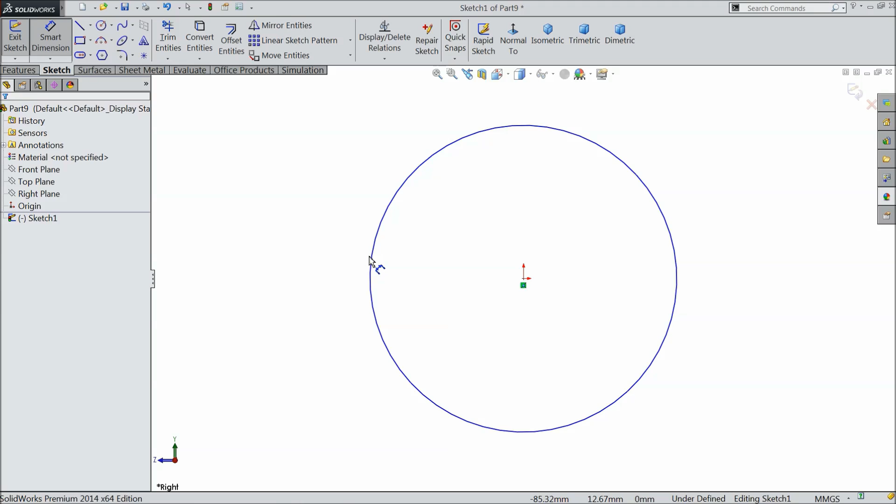Do the next part, shaft. Right plane sketch. First we will create a circle and keep the diameter 10 mm, and extrude it, extrude up to 200 mm long.

Choose chamfer at both ends. Select both ends, 1 mm, 45 degrees. Okay, that's it.

Now again choose right plane sketch, and here draw a bigger circle, let's say 14 mm.

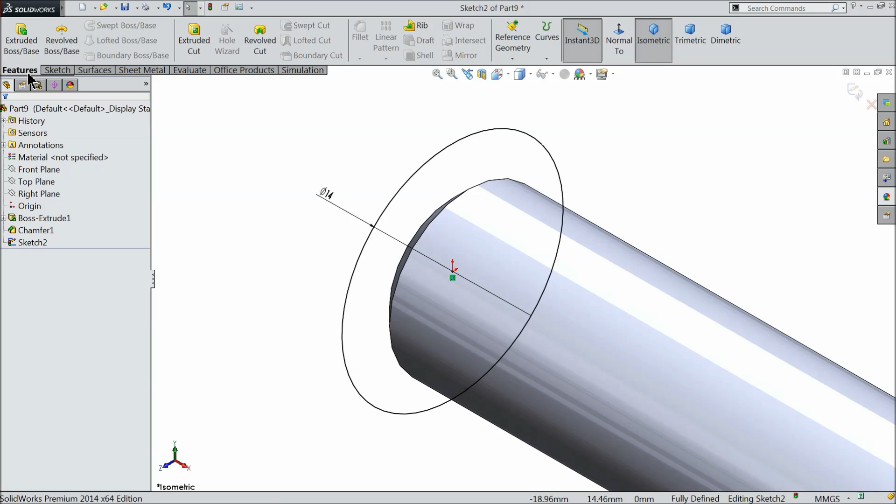Select extruded boss, only 10 mm. Select here offset, 70 mm. Now let's see, 70 mm from right plane. Okay.

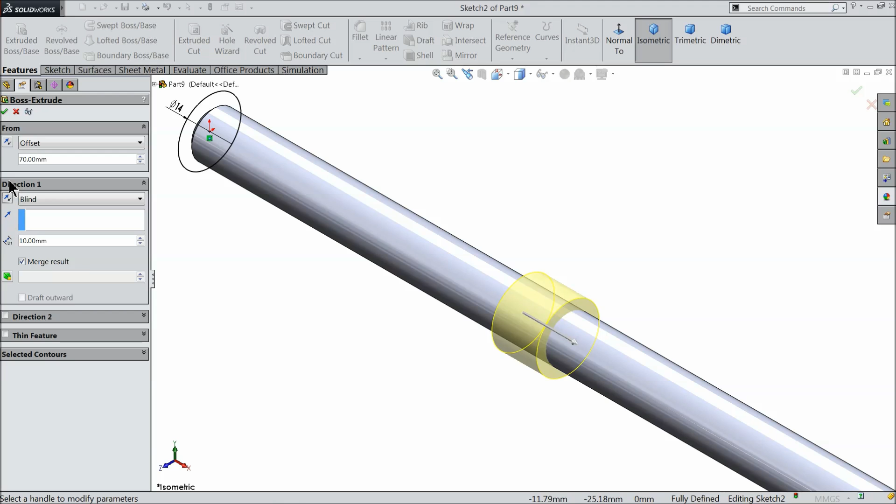See. Now let's give the material to the shaft. Metal, and let's say copper, polished copper. Save. Part number 9, shaft.

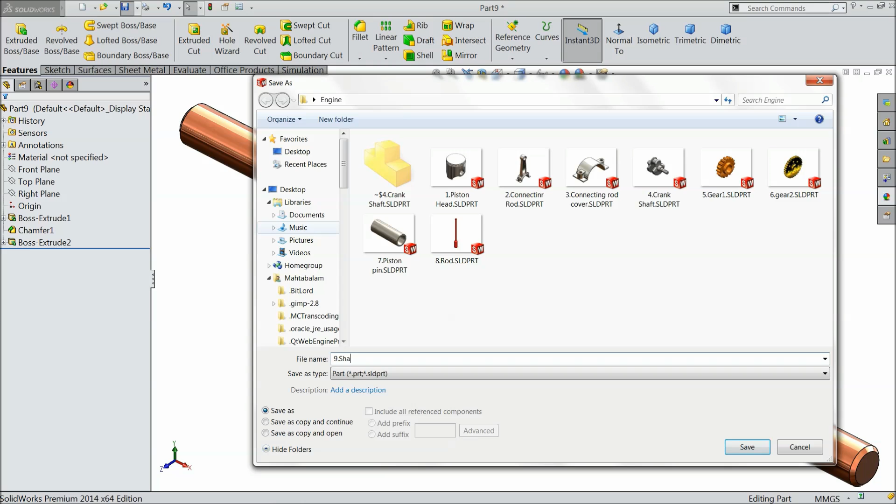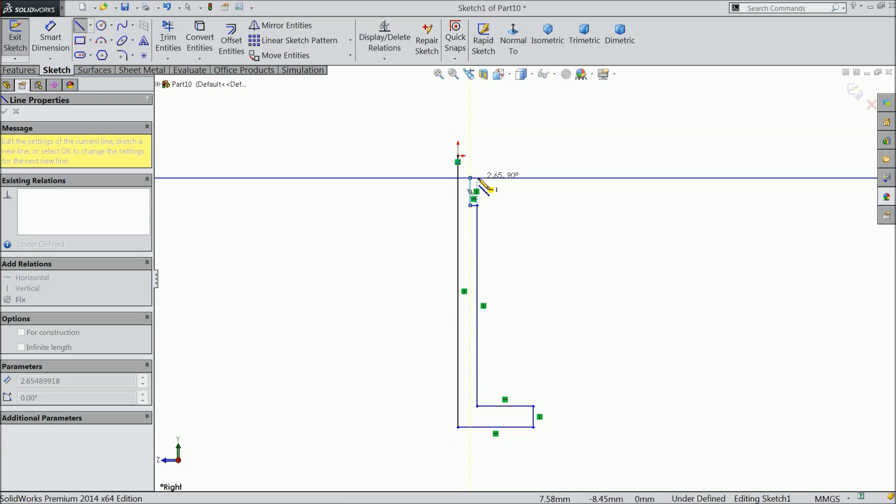The next part here, engine valve. Right plane sketch, line, and start from origin point. Draw a line downward direction. Connect. Exit.

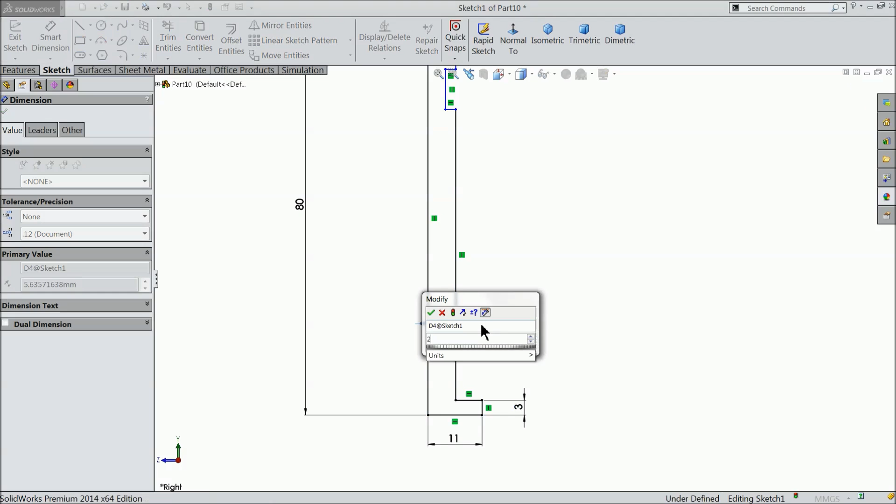Overall length 80 mm. 11 mm. 3 mm. 2.5 mm. 3 mm. 5 mm. 1 mm.

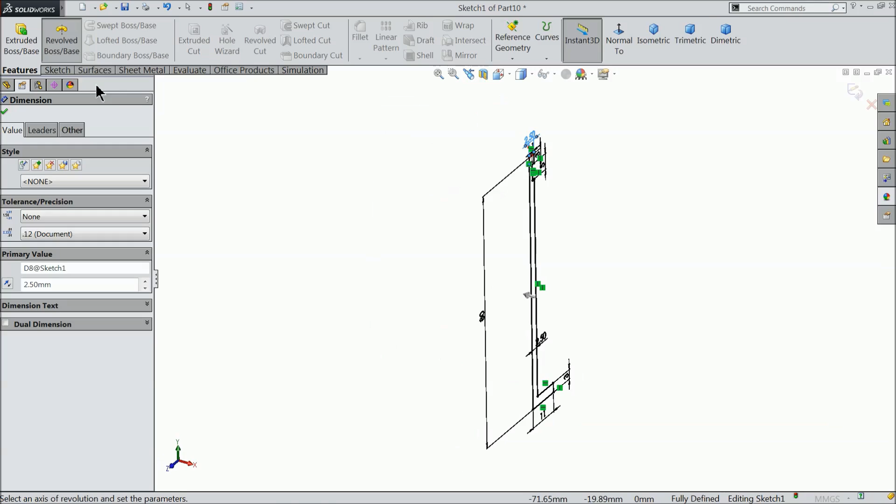Now, two 2.5. Okay. Now let's revolve this body. Select this outer line or mid line. Okay.

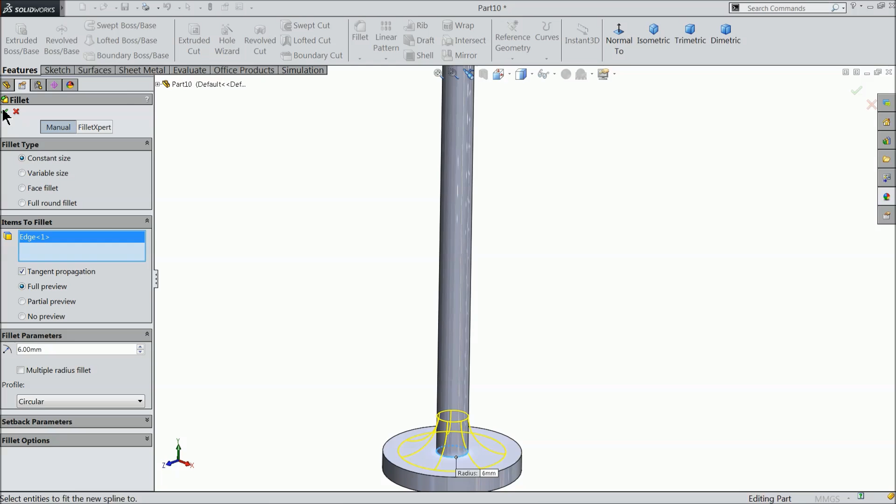Now fillet 6 mm and select this inside edge. Okay. Let's do the chamfer, distance 1/2.

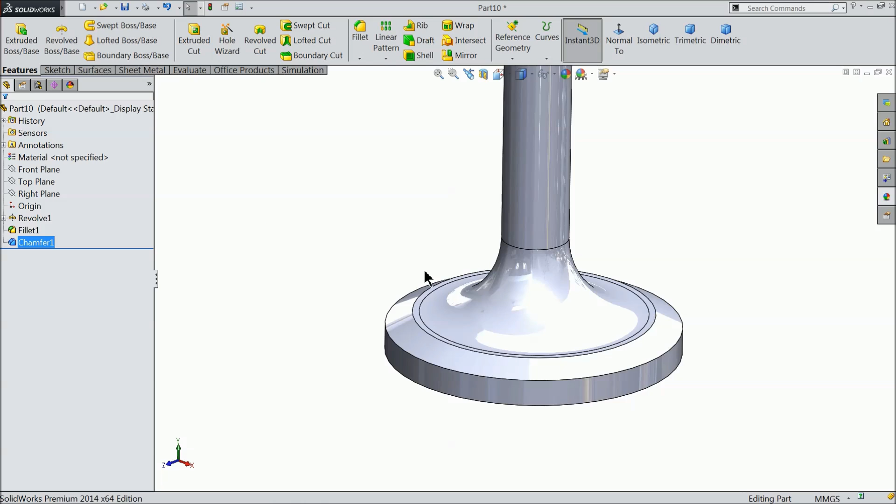Select, clear, select this outer edge only. Okay. Now it's time to chamfer, 1.5. Select the top face sketch.

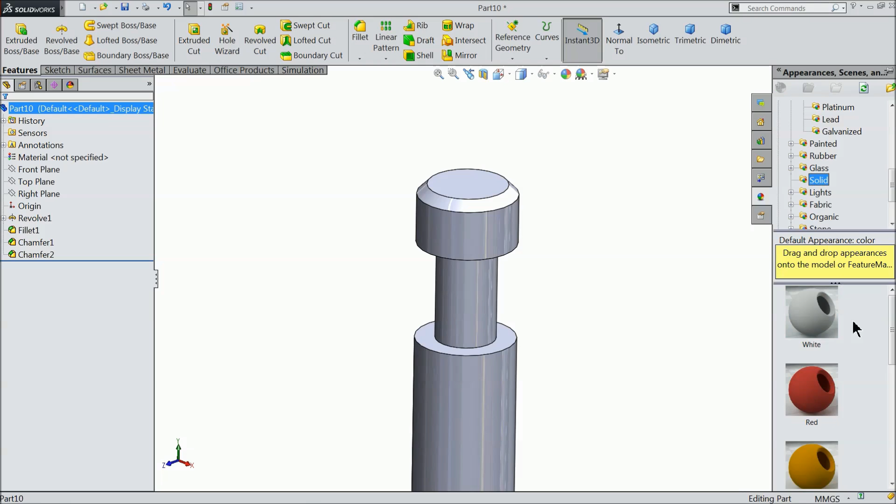Now it's time to define some material. Let's define some solid material, so it's easy to distinguish while it's operating. Save. Part number 10, valve.

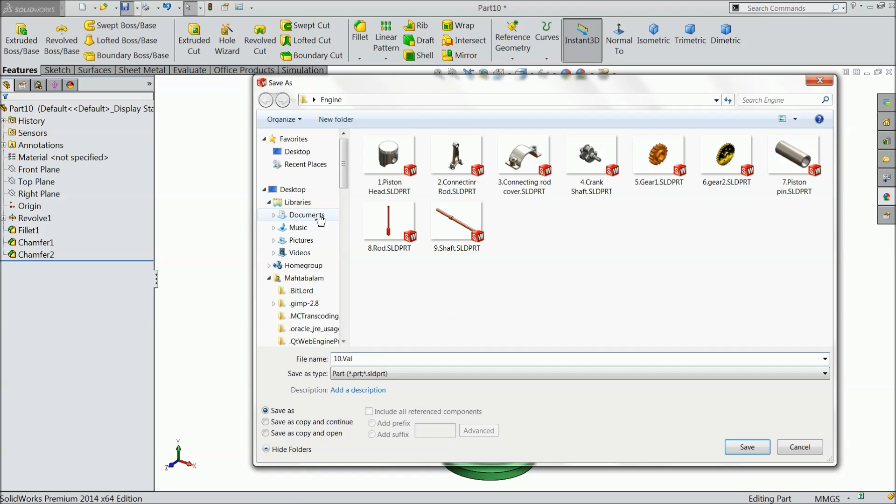Now let's do the next part, valve retainer, spring retainer. The next part here is valve spring retainer. Right plane sketch.

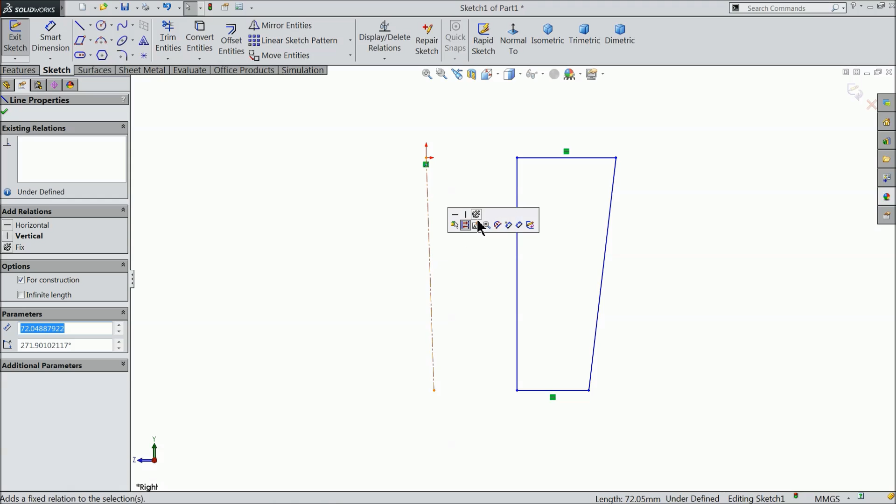Select line, exit, center line, and draw one vertical center line, exit. Select this line, make relation, select this line, vertical relation, make fix, one more relation, select origin point and this line, horizontal.

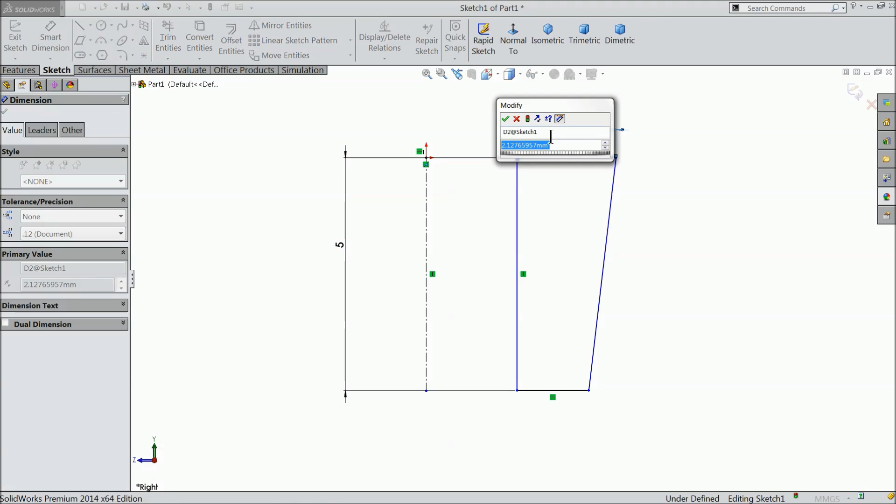5 mm, 3 mm, and the bottom line 2 mm, and let's keep the gap 1.5 mm.

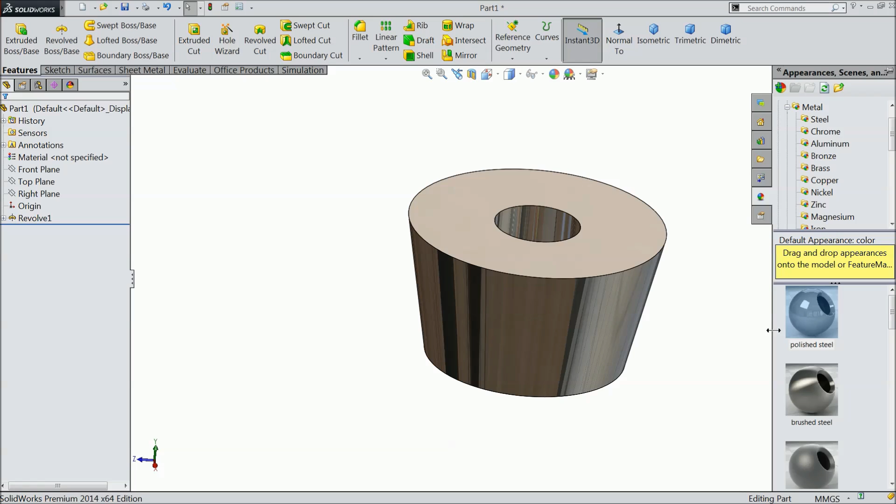Select revolve boss base. Okay. See, let's say steel, polished steel, and okay, keep polished steel.

Save part number 11, valve spring retainer. Save.

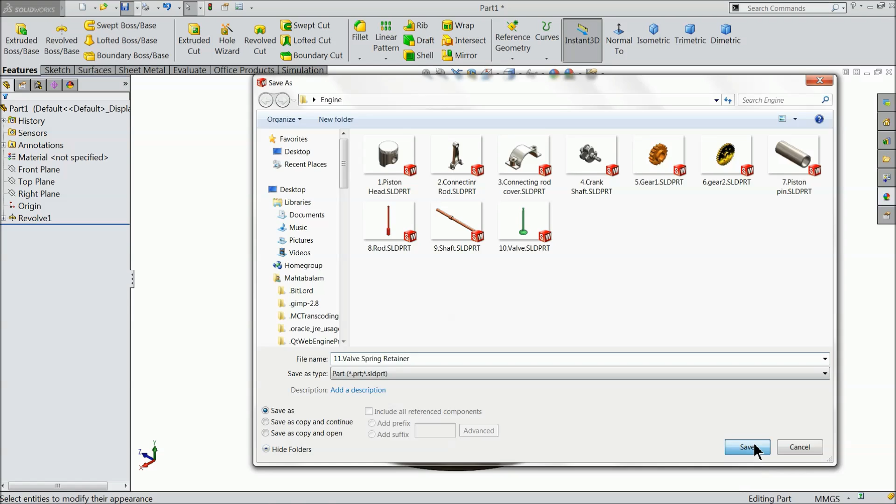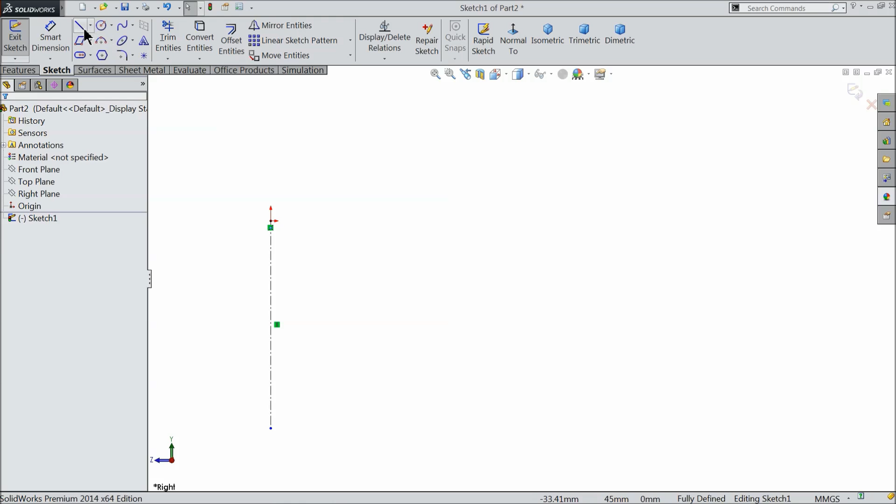Now here the next part is retainer. Right plane sketch, center line, draw vertical center line, that's it, line, and start from here, connect, exit. Now this is our one geometry.

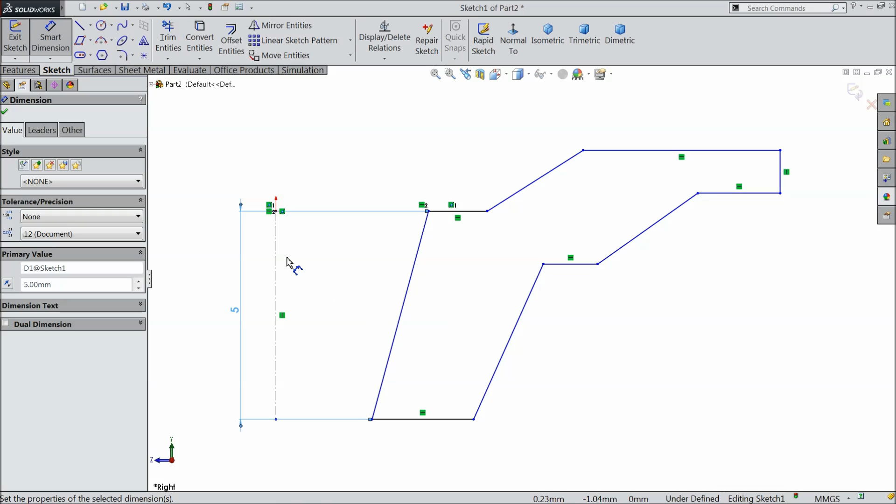We will make some relation. Make these 2 points horizontal. Five mm, 12.5 mm. Start from bottom line.

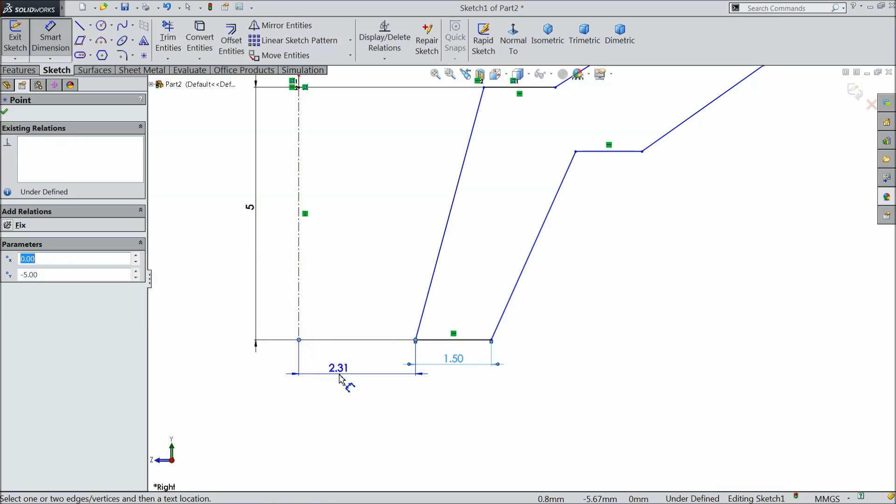One, 1.5 mm, 3.5 mm, 4.5 mm, 4 mm. This 6.5 and it is 4 mm.

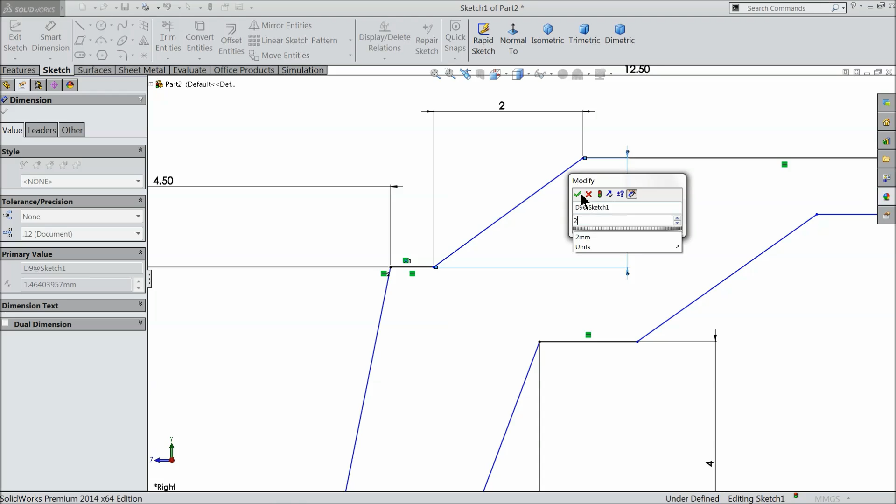Now two mm, again select and vertical also 2 mm. One mm and this keep 2 mm.

Okay. Now select these two lines, make relation parallel. Okay. Now see here.

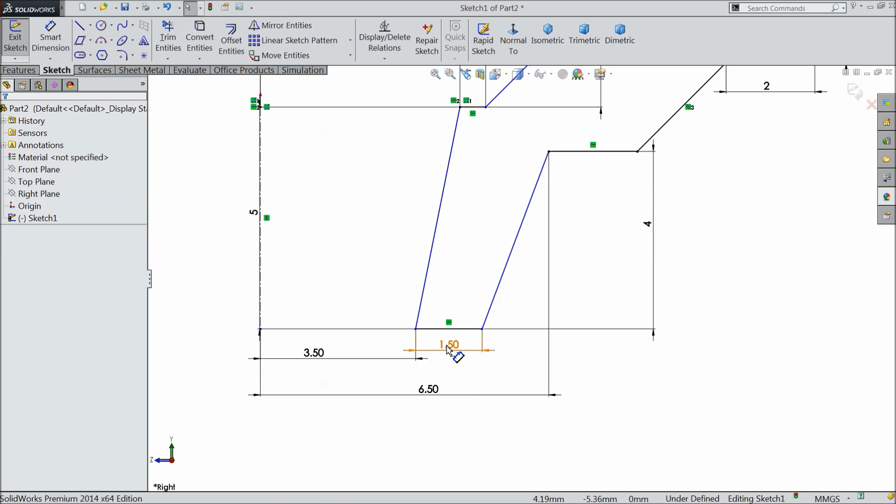This mid, 1 mm. Okay. Now this distance also we defined.

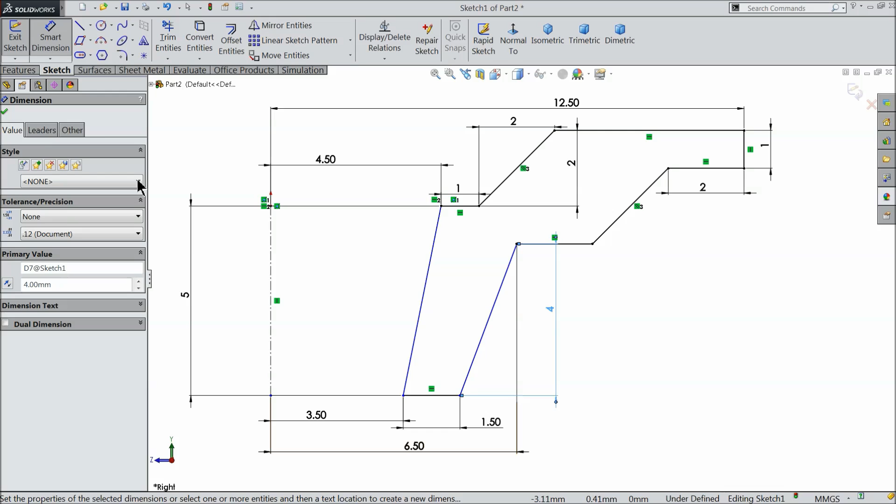Okay. Now select here fully defined sketch, calculate. Okay. I think everything we defined, nothing is balanced here. Cancel.

Select here revolve boss base. Center line selected. Okay.

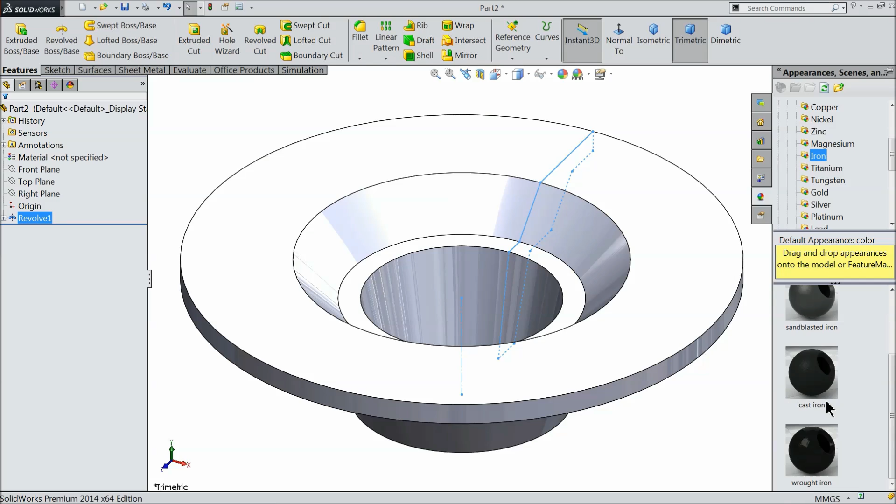And for the retainer, choose here iron, matte iron, sand blasted iron. See, save. Retainer.

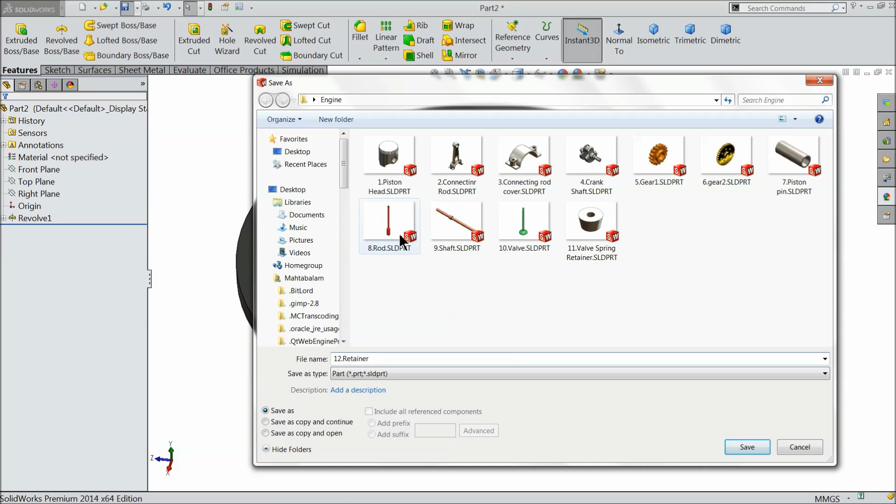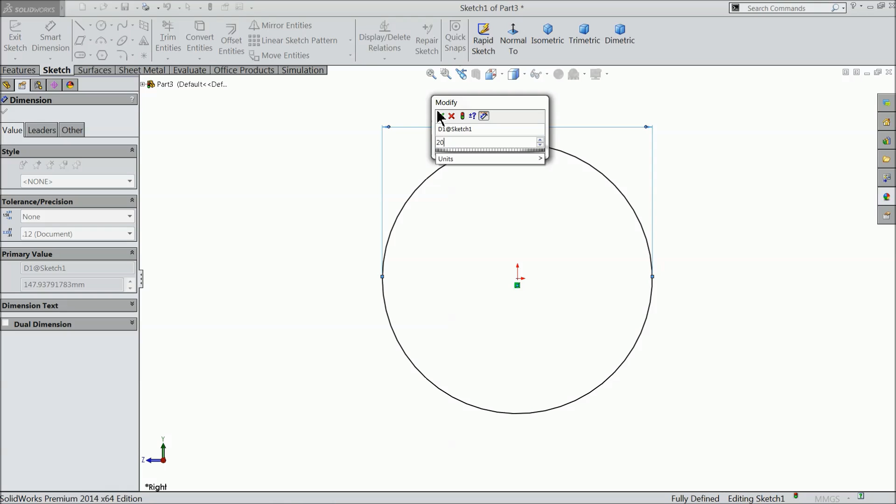Let's see the next part. Here the next part is camshaft. Select right plane, sketch and define a circle. Let's say the diameter is 20 mm. Okay, select extruded boss.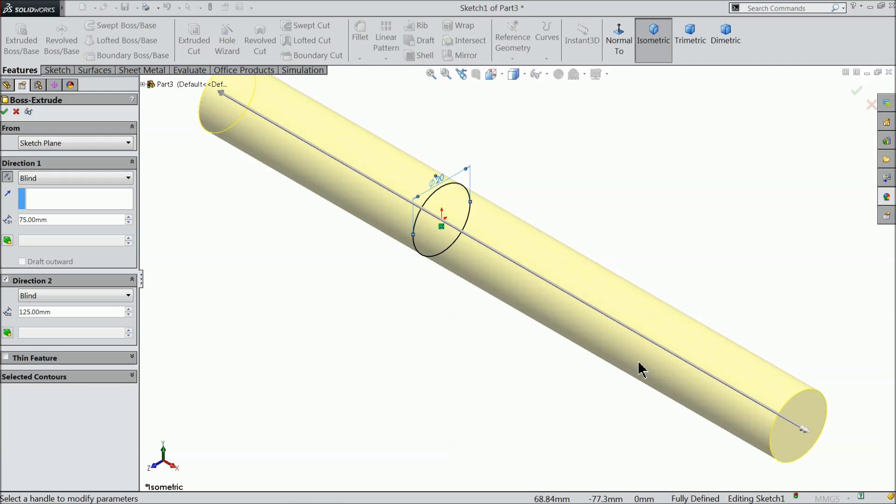Here first dimension select 75. Select reverse direction. Direction 2, 125 mm. Okay, now this is our dimensions.

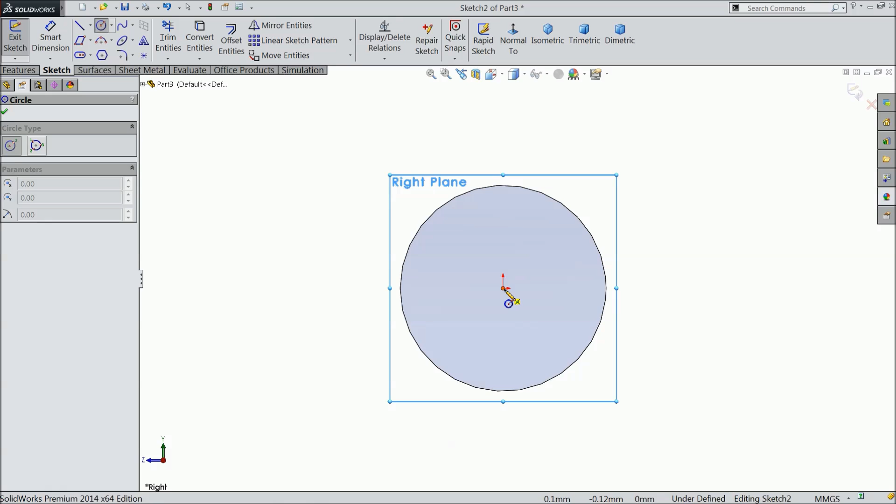Now select right plane, sketch normal, and here we will make some geometry. Diameter 24 mm.

Connect these 2 points. Again choose circle and draw a circle. Let's keep the diameter 10 mm. Okay. Now here select 3-point arc.

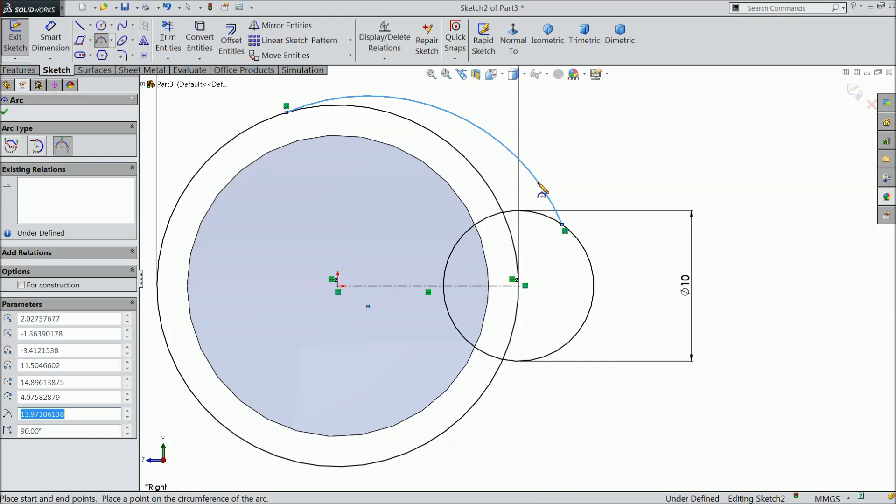Again select from this point to this arc, exit. Now here we want to trim some unnecessary part, so choose power trim, just press and drag. See, okay.

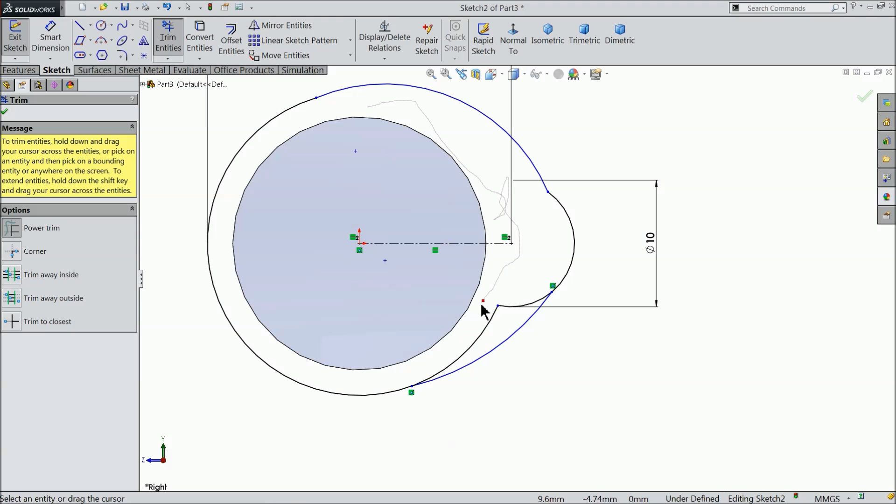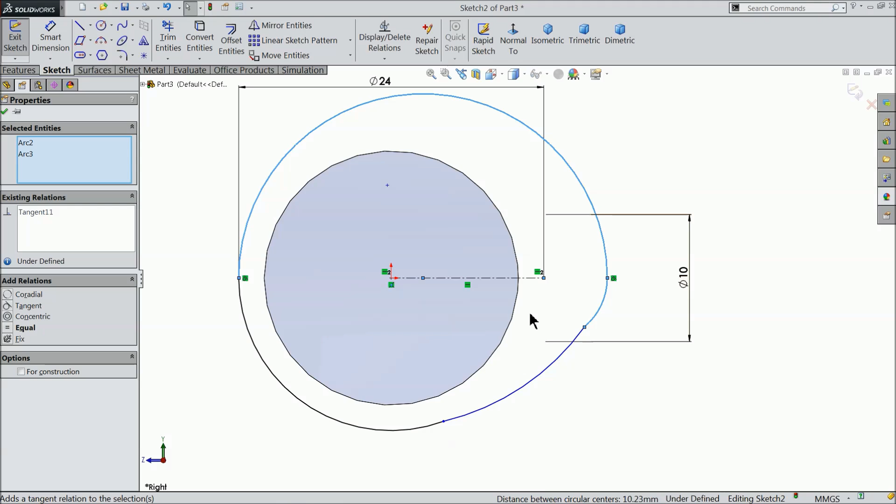Now let's prepare some relations. Tangent, tangent, make again, undo.

First define this radius, 16 mm, 40 mm, and this one 10 mm already defined.

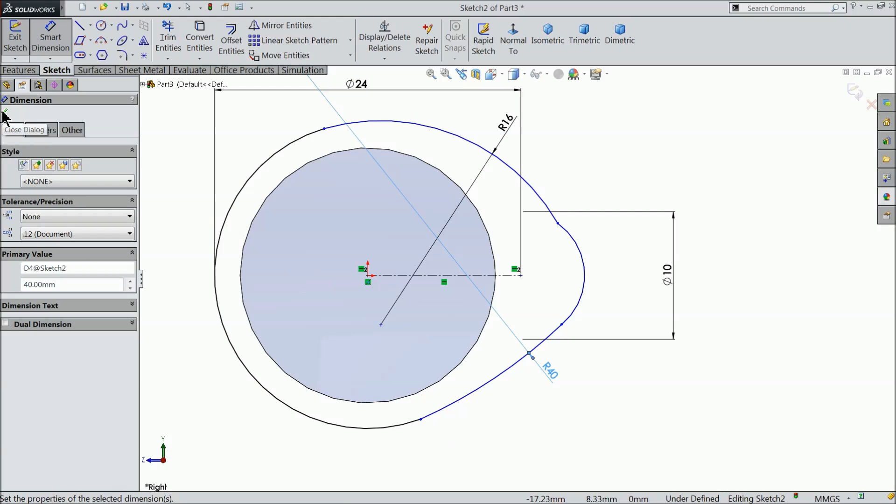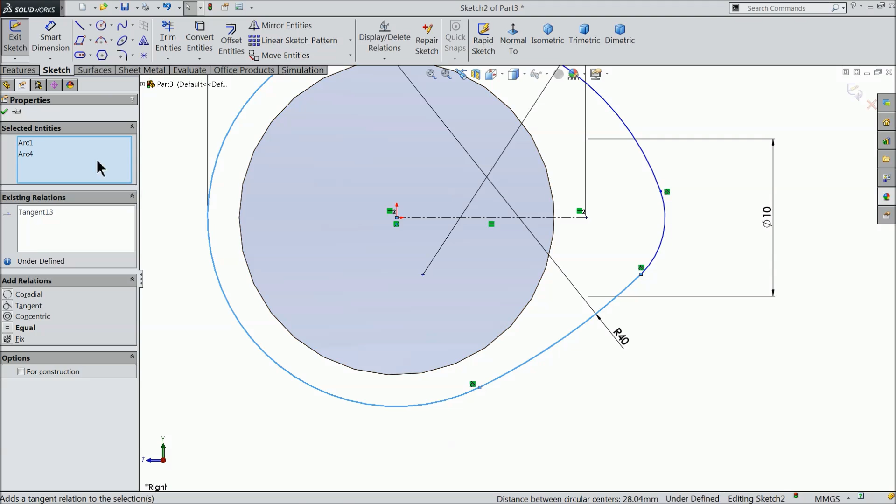Okay. Now let's try to make them tangent. Okay, and here also let's make tangent, and select the last one, tangent. Okay. Now choose smart dimension, select both end points, see, and select this arc.

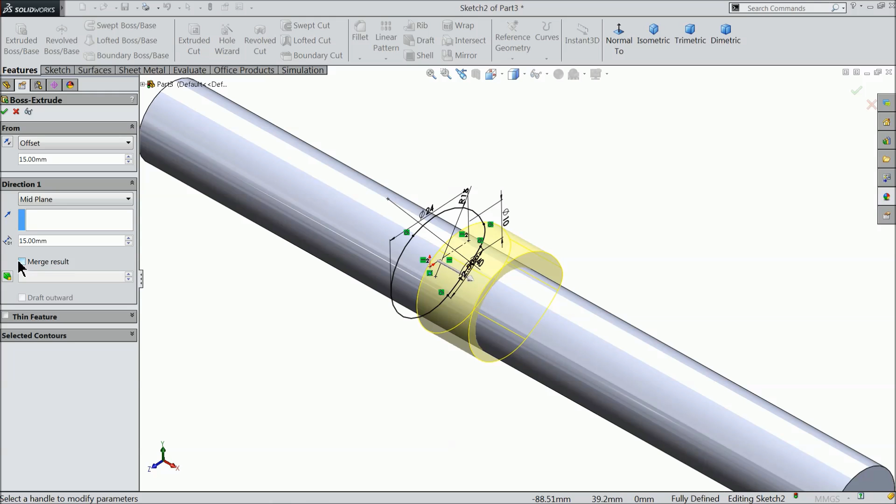Okay, see, now let's try to mirror. Select right plane, mirror, select this body. Okay.

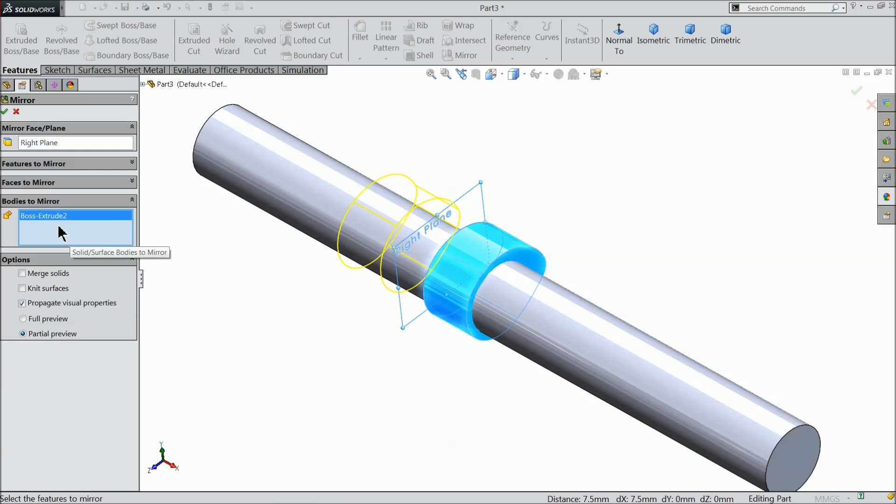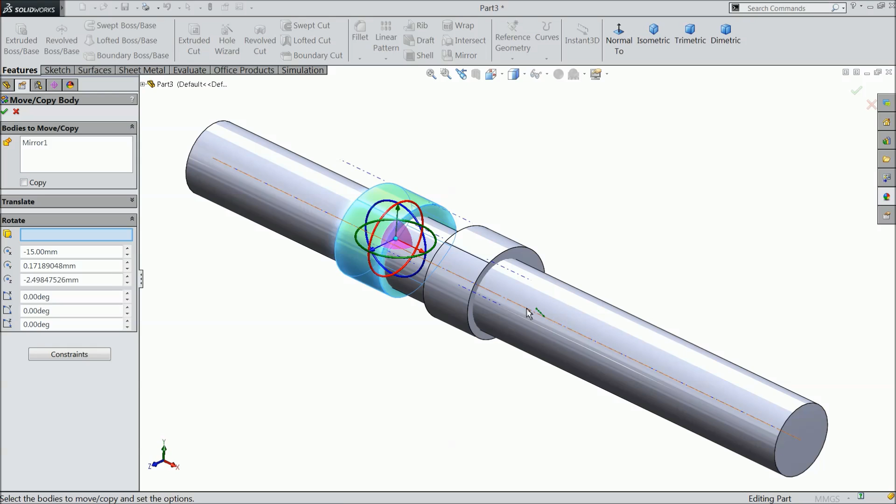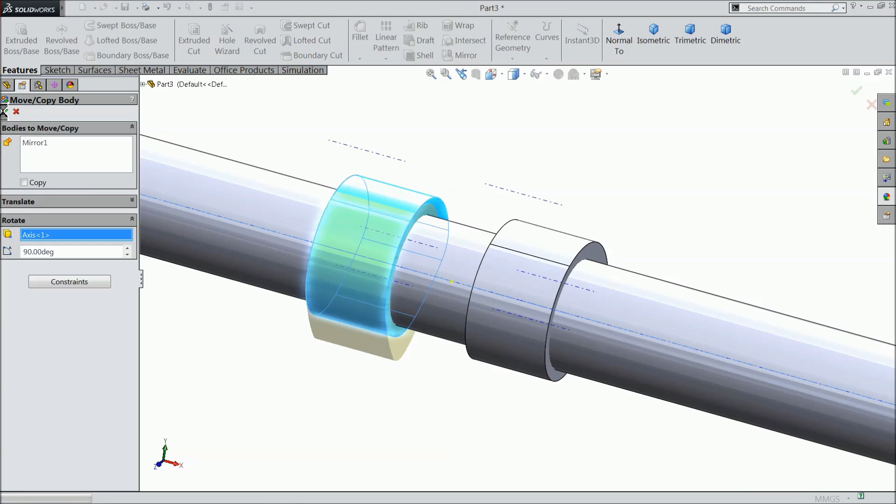Now go to feature and select one option, move and copy. Select this body. Select translate and rotate. We want to rotate this body, so select rotation. Select here temporary axis, select this axis, 90 degrees. We selected the rod center axis and we want to rotate it up to 90 degrees. Select here copy. No need copy. Okay, see, it's rotated.

Now hide this shaft. See.

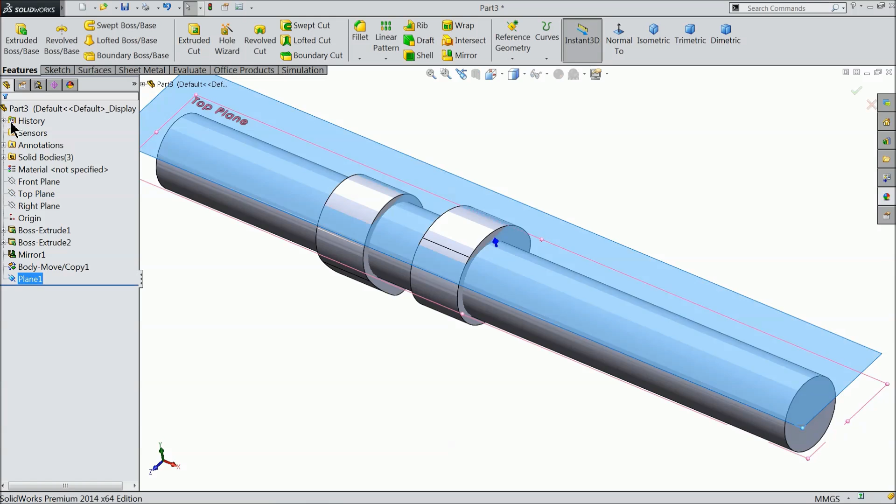Now top plane, and create one plane just above the top plane 10 mm. Okay, now select this top plane 1, sketch normal. First draw a midpoint. Then select center point straight slot. Exit. Now let's define. Select both end points of slot, 20 mm, and the distance from outer edge 8 mm, keep the radius 4 mm.

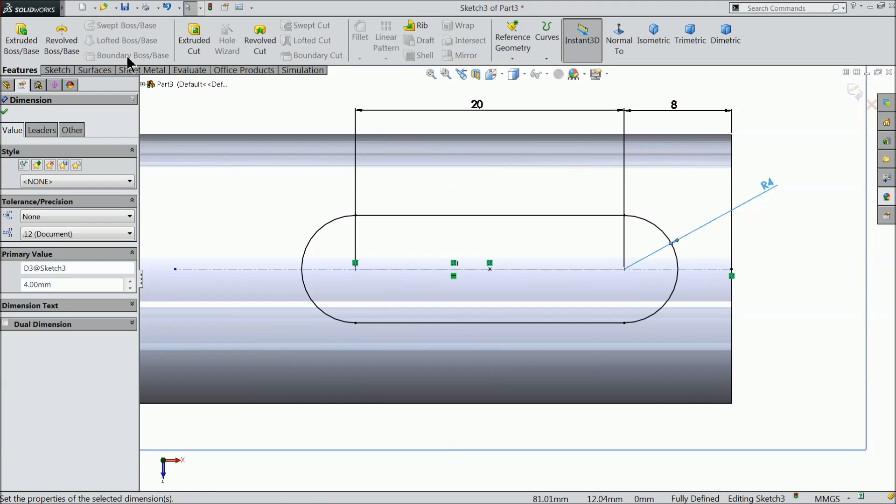Okay. Select extruded cut and cut up to, keep the depth 4 mm. Okay, now see, now hide this plane.

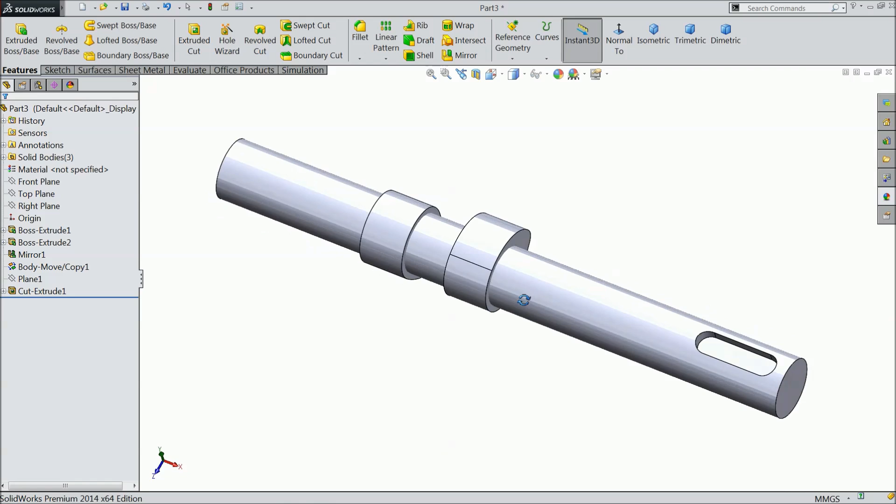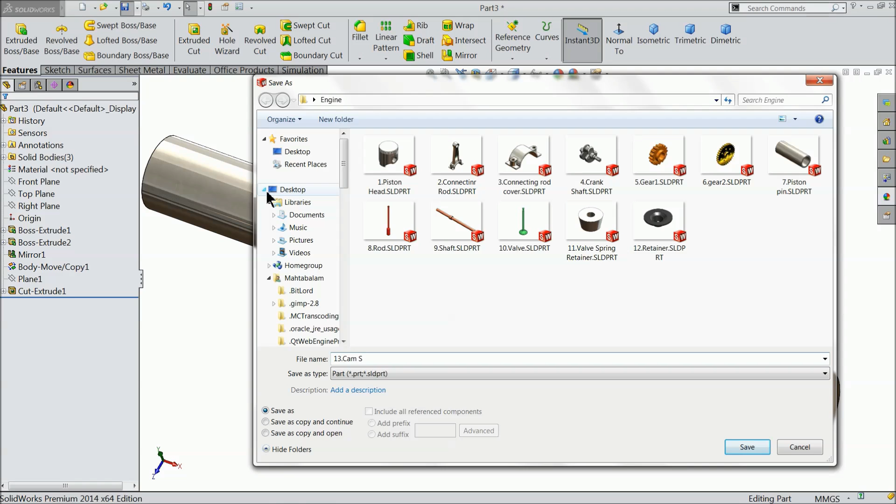Now this is our camshaft. Let's define some material. Polished steel. Save. This is part number 13, camshaft. Save.

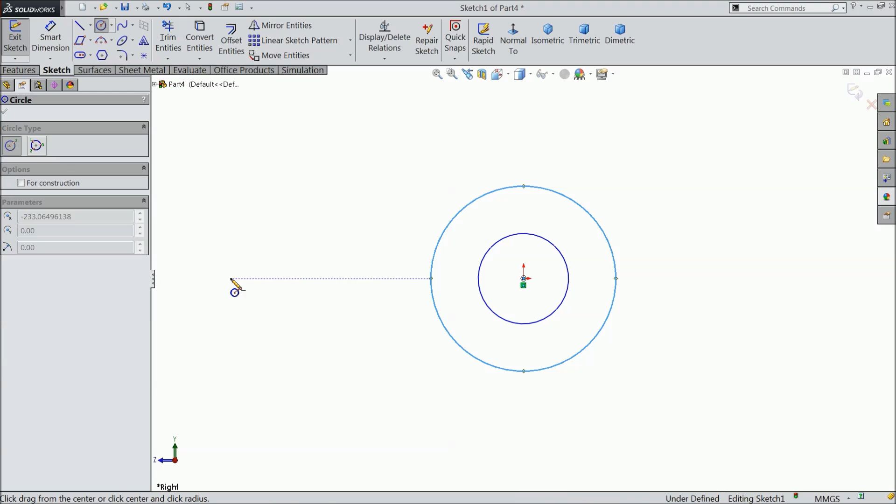The next part here is rocker arm. So select front right plane, sketch, select circle, draw 2 circles, one more circle, exit.

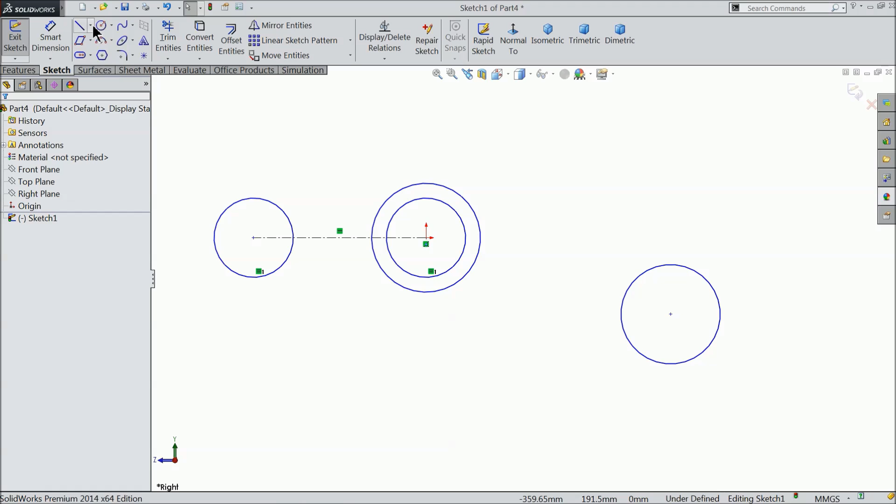Select these 2 circles, equal. Center line, connect these 2 lines, again draw one line and connect with this circle, horizontal. Let's define.

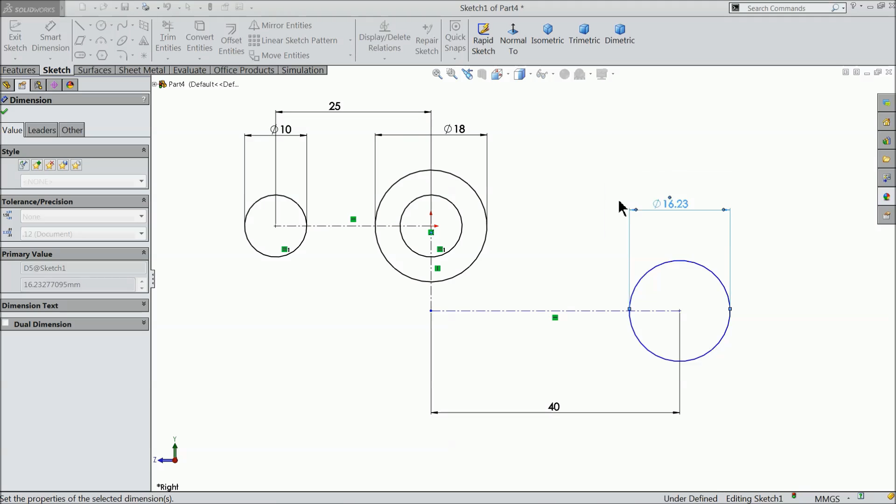The gap is 40 mm, 25 mm, 18 mm, 10 mm, 10.9 mm, make it 11 mm, and this distance 8 mm.

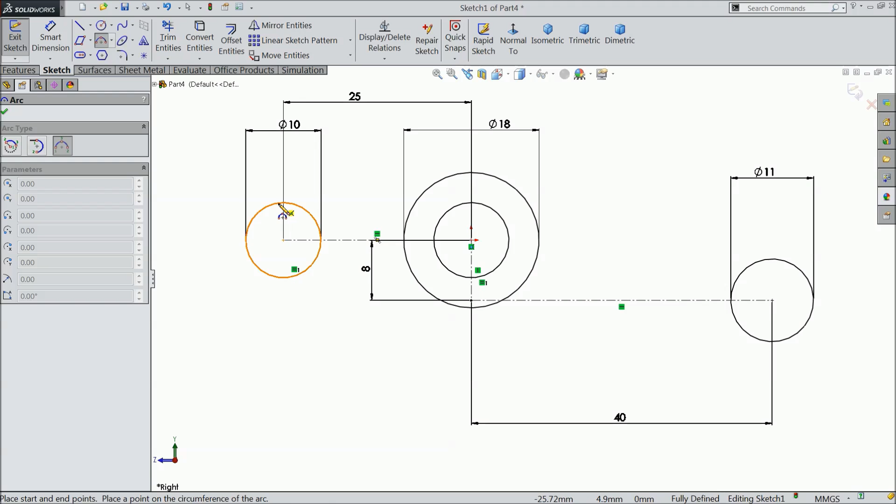Okay, now choose here 3-point arc. Select this circle to this circle, and again choose this circle to this circle, and the third one, again select these two circles, exit.

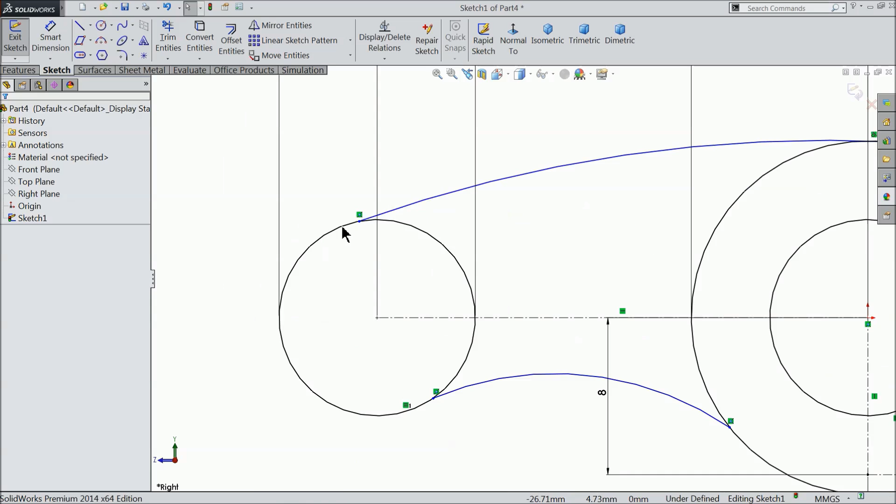Select these two lines, tangent. Here also tangent, and select this end, tangent.

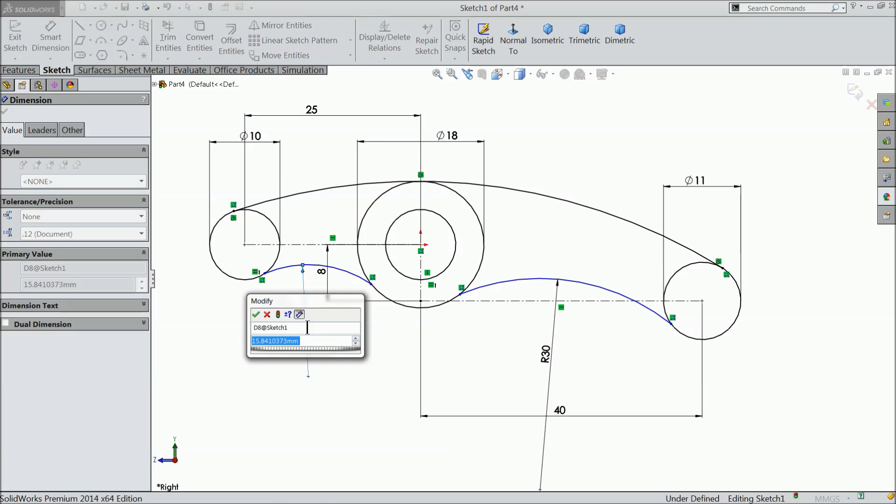Let's define. Keep radius 30, 20 mm. Okay, it's by default.

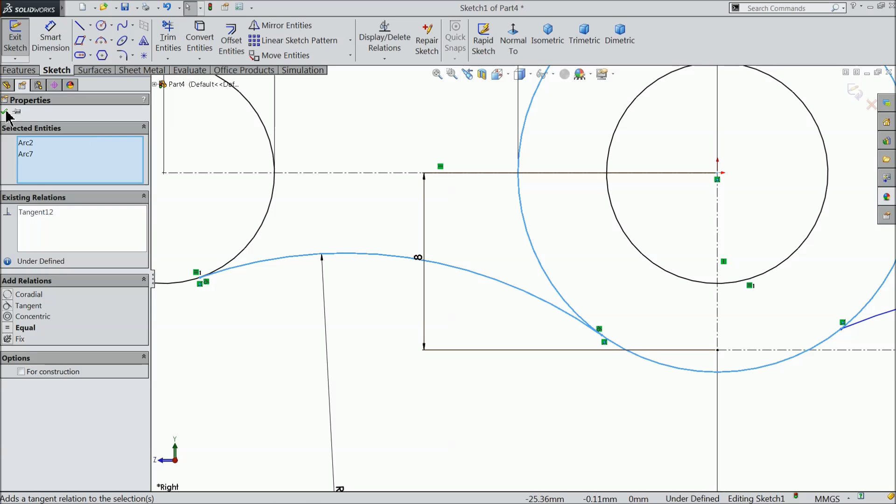Now select this circle and arc, tangent relation. Choose here also same tangent relation, and this end also same tangent relation. Okay, see, our geometry is fully defined.

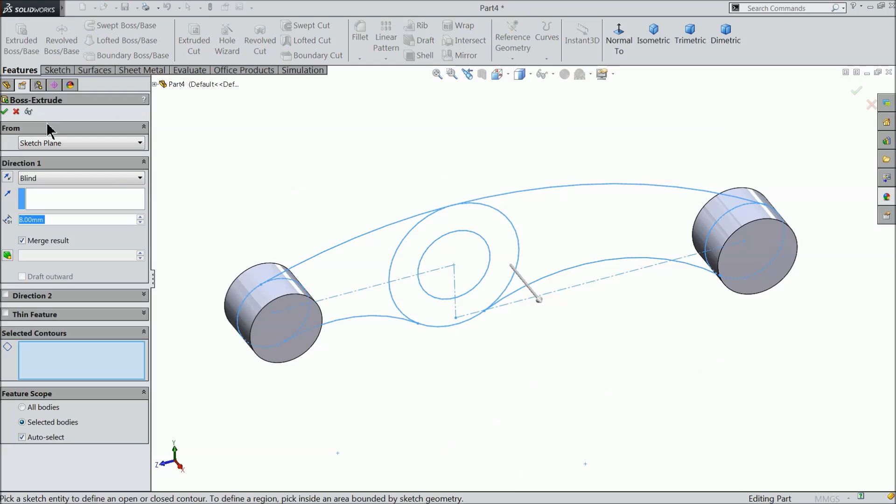So select extruded boss. Now this time we will extrude only these two circles. Keep here mid plane, 8 mm. Okay, see, now again choose the sketch, extruded, this face and this face, mid plane, only 5 mm. Make sure merge result. Okay.

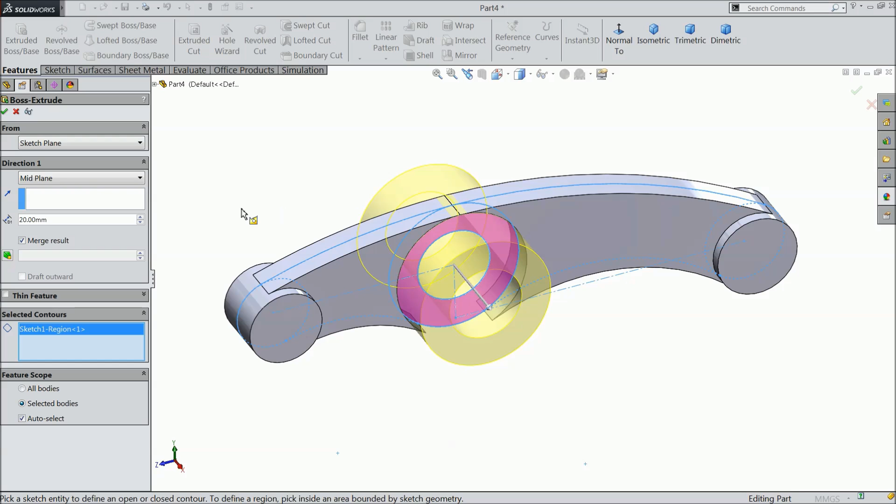Sketch 1, extrude, select mid circle, end condition always mid plane, and 20 mm the length. Okay, see here.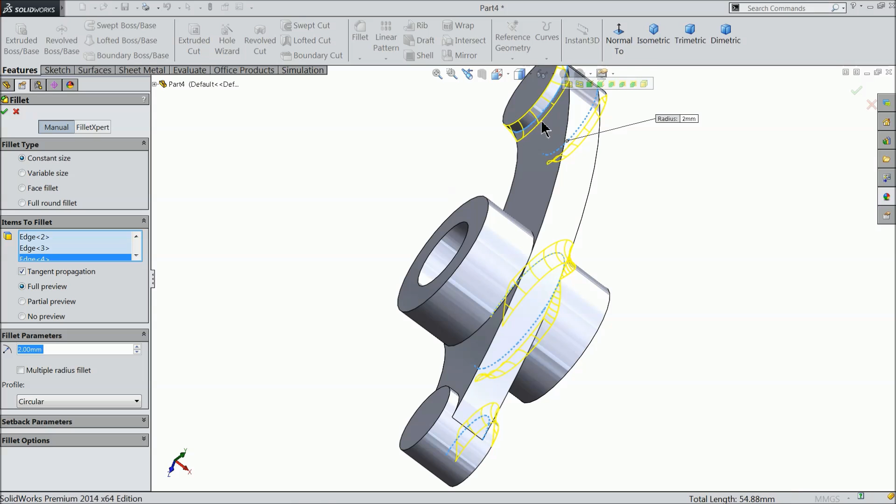Fillet, F2, select these edges in both face, both side, 2 mm. Okay, see here.

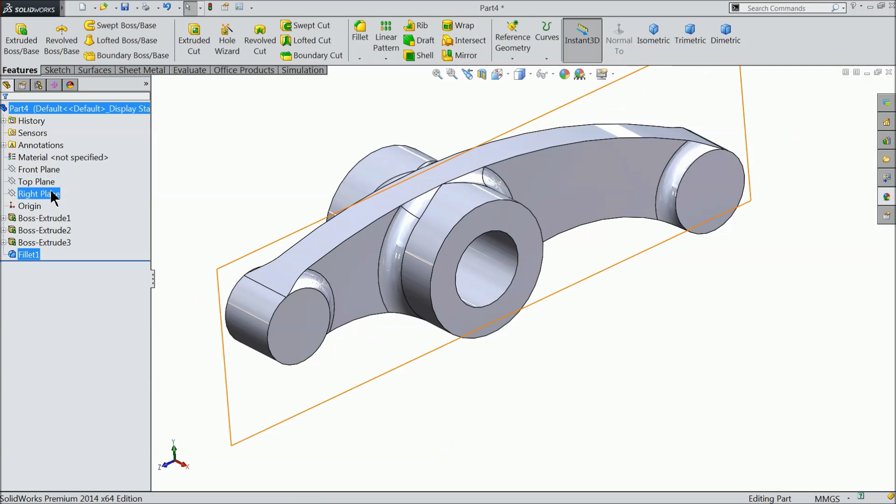Now create one plane, top plane, plane, 5 mm and flip reverse direction. Okay, now select this plane.

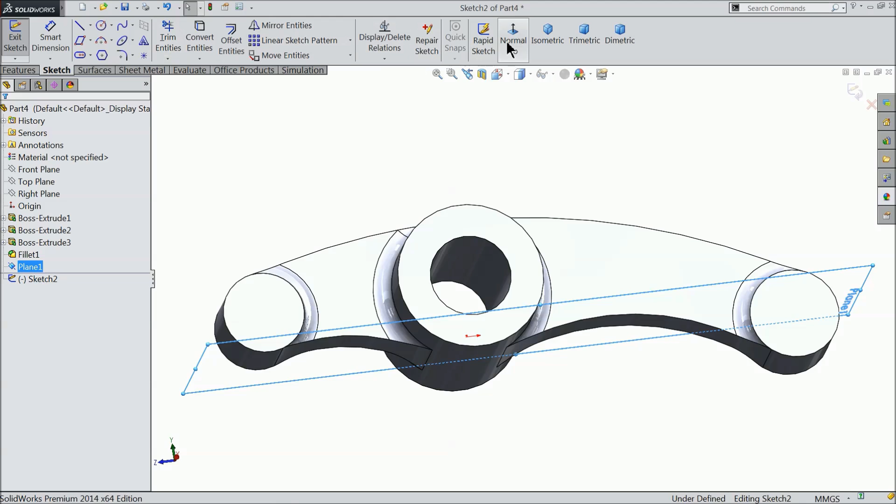Sketch normal, and here draw a circle and keep the diameter 10 mm and distance from origin point 25 mm. Okay, select origin point and circle center point, vertical.

Okay, now select extruded boss, keep only 6 mm. See here, an angle 10 degrees. Okay.

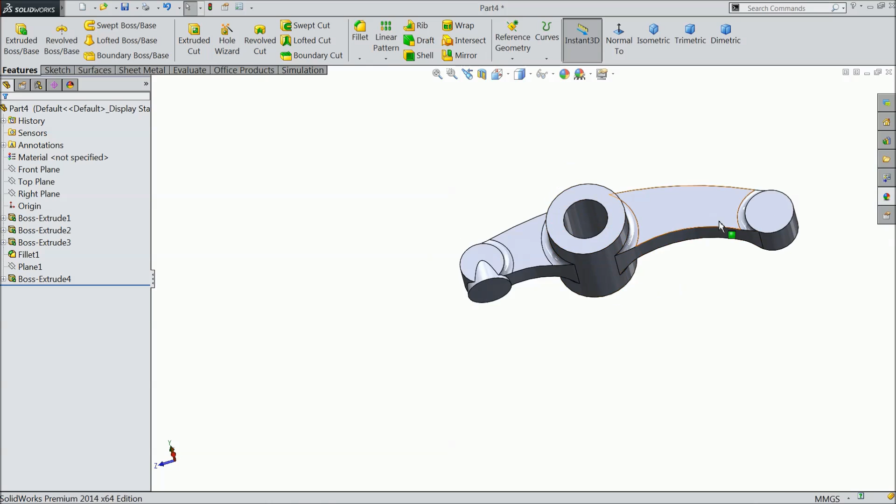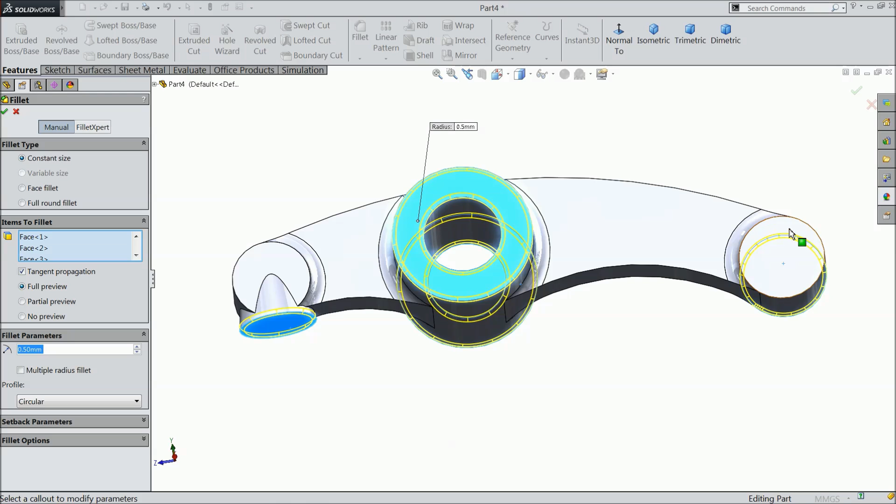Now hide this plane, fillet, 0.5 mm and select this face, deselect this edge. Okay.

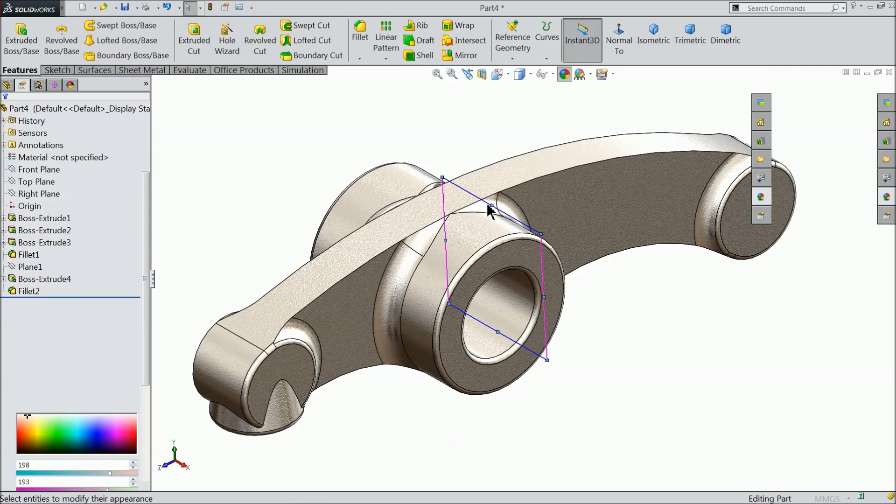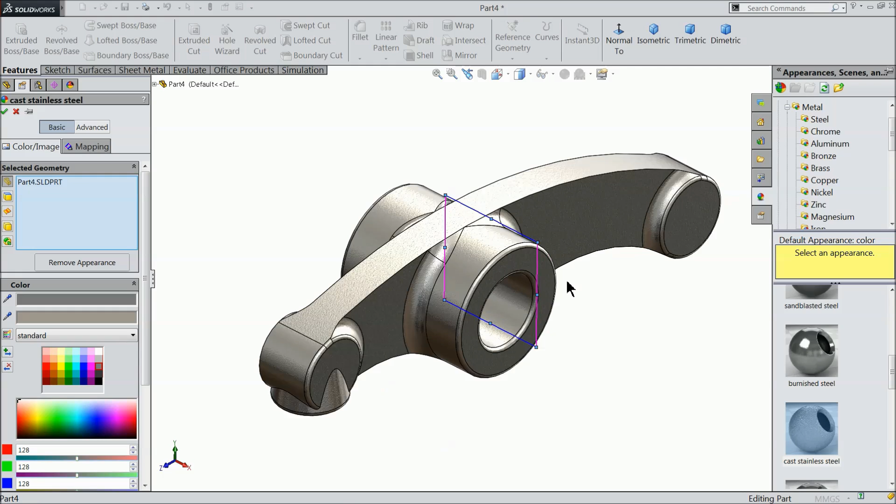Now it's time to define the material to rocker arm. Select the full body, and we will define cast stainless steel, and let's make some color to it. This is quite better. Okay, now save.

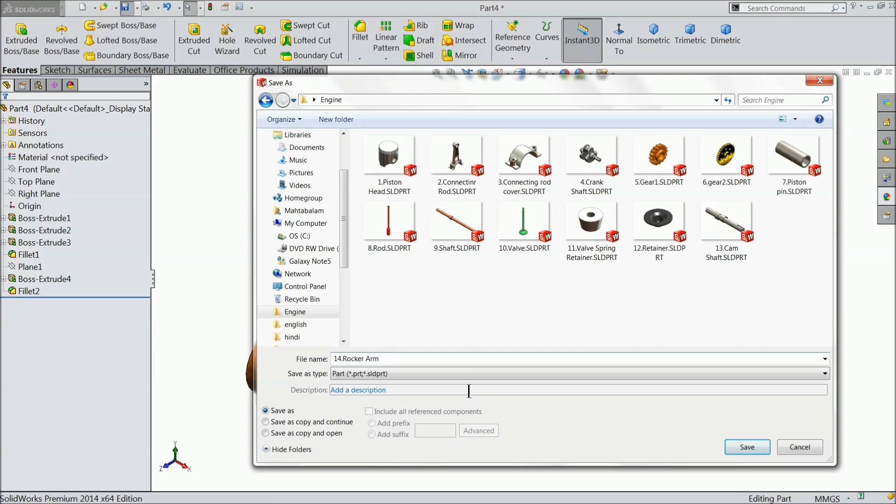Now we will start the sub assembly of engine, some parts, piston. Here let's do the sub assembly of valve. Select here new assembly. Okay, this is the SolidWorks assembly window. Let's browse. First choose valve, open.

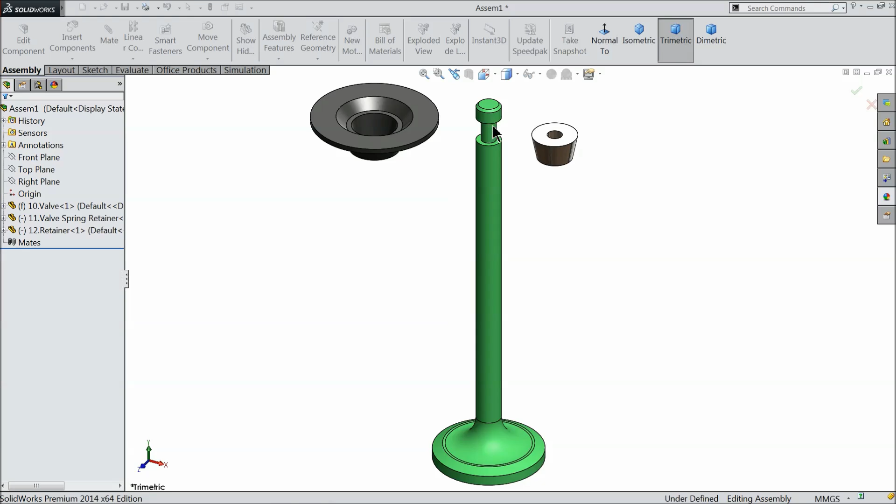Now browse the another component. Choose here valve and retainer. This is retainer, this is valve. Mate, select this and this hole. Concentric relation, okay.

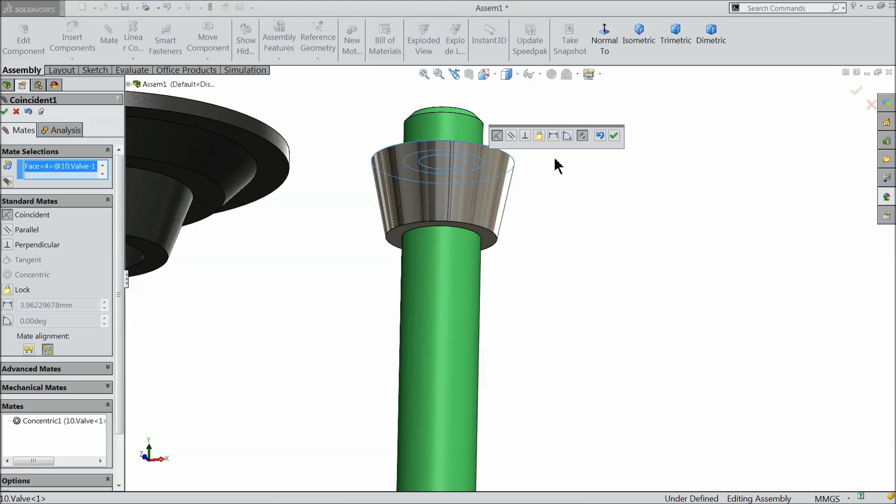Select this face and this face. Coincident, okay. Select this face and this face. Concentric relation, okay. It's fixed, no need to move any.

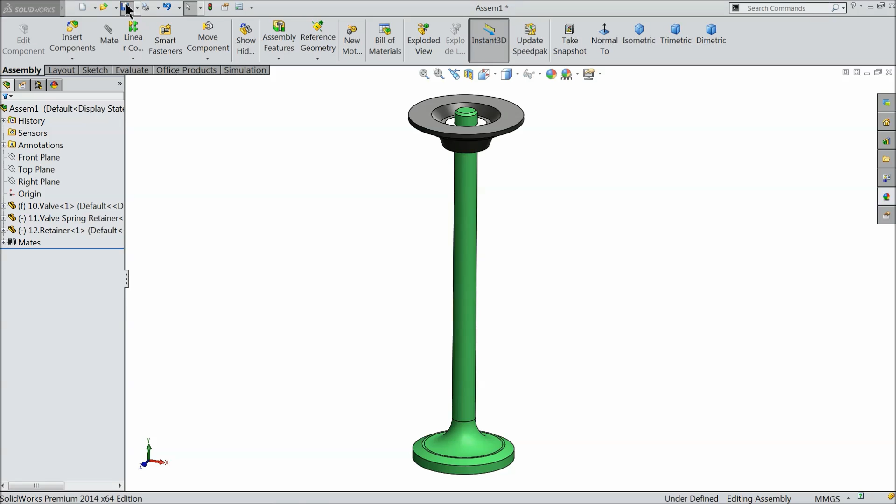So this is our valve assembly, valve sub assembly. Now save. Valve sub assembly, save. Let's do the further assembly.